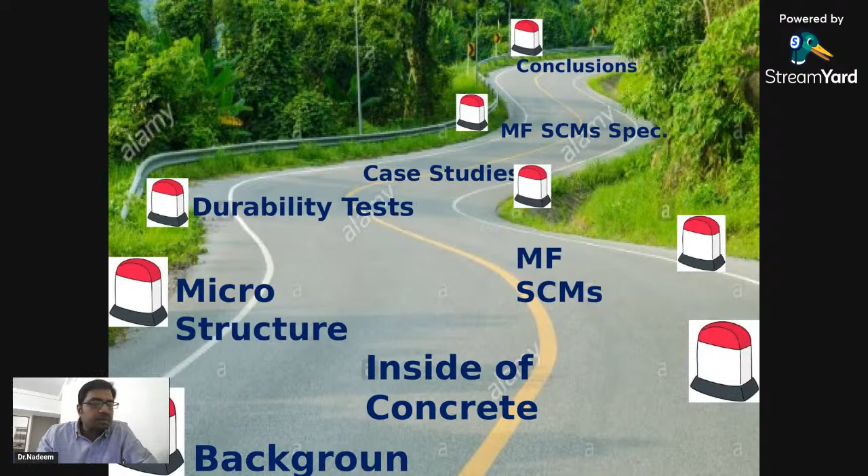To begin with, of course, importance of concrete microstructure - the properties of any material, whether concrete or any other material, is governed by its internal structure. For example, if you see steel, a slight increase in carbon content - say mild steel has a carbon content of less than 0.25%. As carbon content increases beyond 0.3%, a slight change in the microstructure level changes the entire property.

So this is very, very important. If we want any properties to be changed, that needs to be worked at a microstructure level. And this is the topic which we'll be covering in depth in today's presentation. So coming back to concrete, in concrete, porosity rules the properties. And we'll see in subsequent presentation how important it is to address porosity in concrete, for a long, sustainable, and durable concrete. This microstructural understanding opens the world for better material processing.

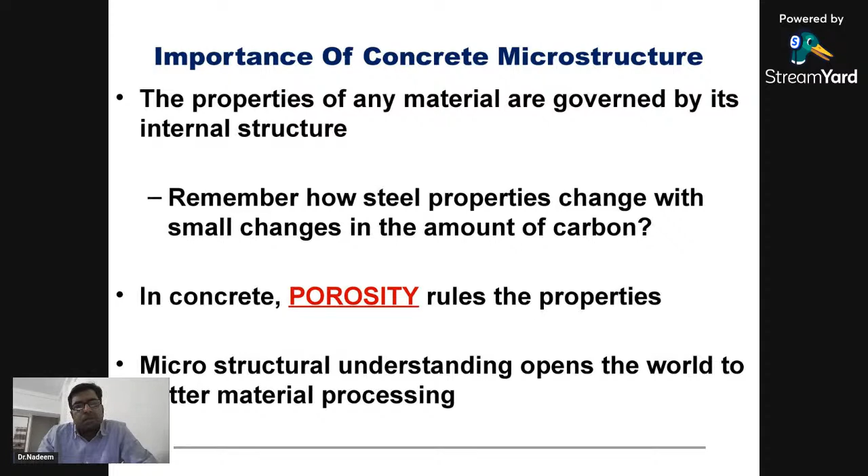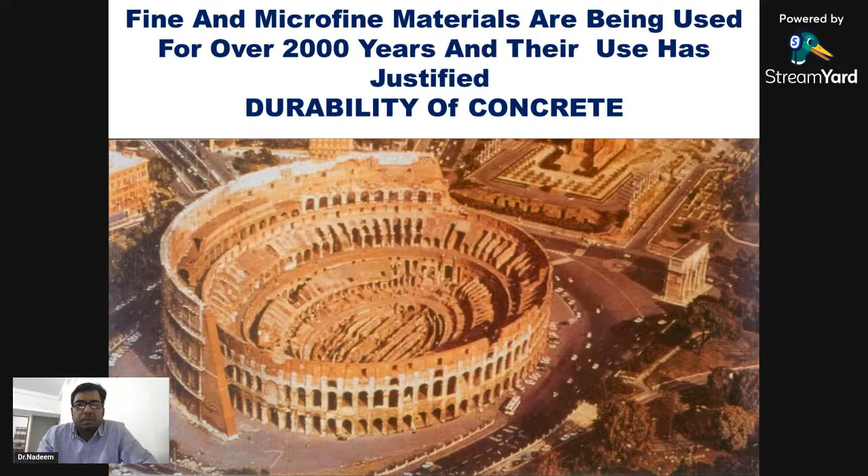In the past, if you see, Romans built very long-lasting and durable structures. 2000 years back, they were using all those advanced materials, which we now call advanced material - fine and microfine materials, maybe in the form of pozzolanic material. This is the reason all their structures are still intact after 2000 years. Based on durability parameters, those structures are still intact and standing. So these are the various properties of those materials being used in that concrete to make a durable concrete.

In modern times, also a lot of structures are being built. So many examples are there. I will not go into depth of those structures, but just to name Burj Khalifa, the tallest building - even in our country also, a lot of infrastructure projects are coming up. Even tall structures are coming up based on utilization of those materials.

Coming back to the definition of HPC, here we are talking about high performance concrete where all those materials are being used. As per ACI, any concrete which is meeting the special combination of performance and uniformity requirement, which is not possible with normal conventional concrete, is normally referred to as HPC concrete.

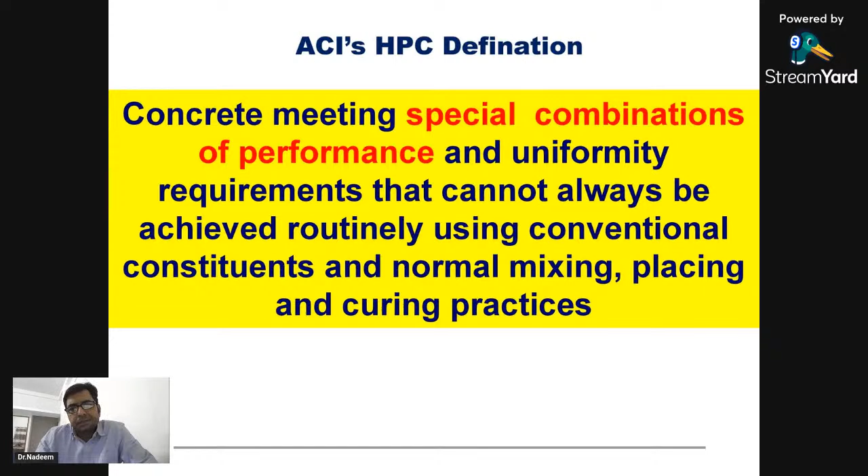And if you just see the history of use of HPC concrete after 1970, a lot of structures have been built by utilizing HPC concrete. Way back in 1973, Water Tower Place in Chicago used concrete of 62 MPa, and subsequently a lot of structures which came started using HPC with a high grade of concrete.

So there is a difference - high strength concrete is not HPC, but HPC is normally associated with high strength or high grade of concrete. So there is a clear cut differentiation which is mentioned as per the definition of ACI. So these are the list of various structures where high performance concrete is used.

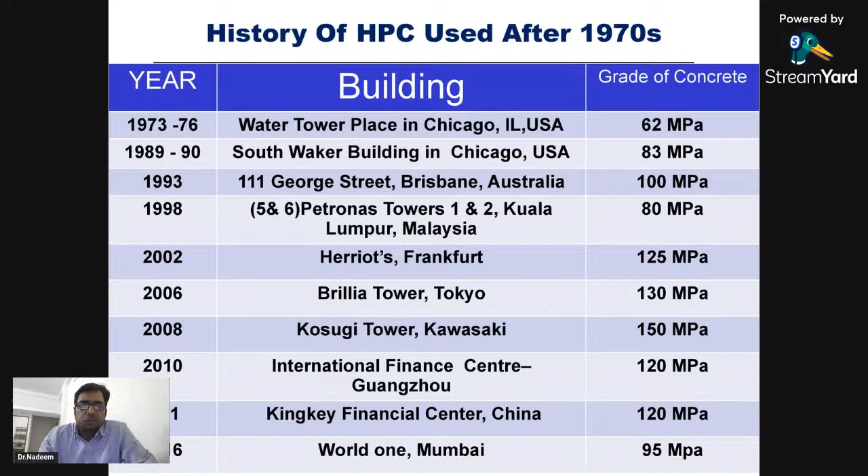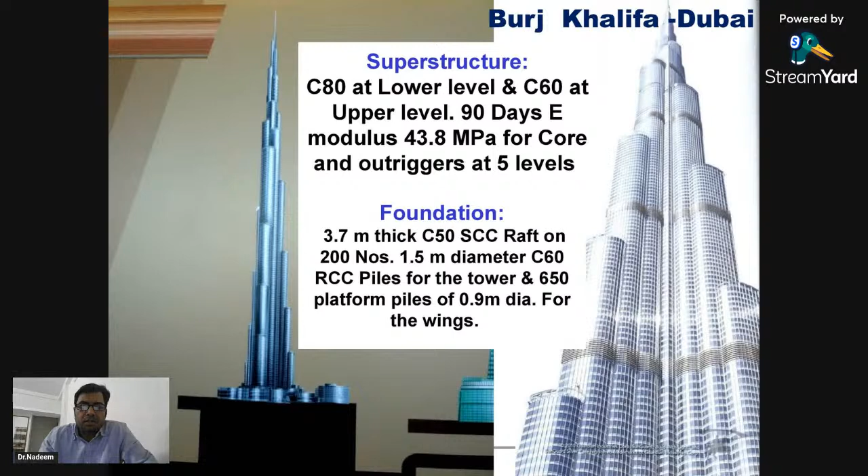Again, here being used at a lower level, with a 90 days modulus of elasticity of 43 or 44 GPa for the core and outriggers. Foundation was 3.7 meter thick, and these are the various parameters.

Across the globe, if you see Brillia Tower, Tokyo, M130 grade of concrete is being used. If you see another tower, Kosugi Tower, M150 MP grade concrete is being used in those structures.

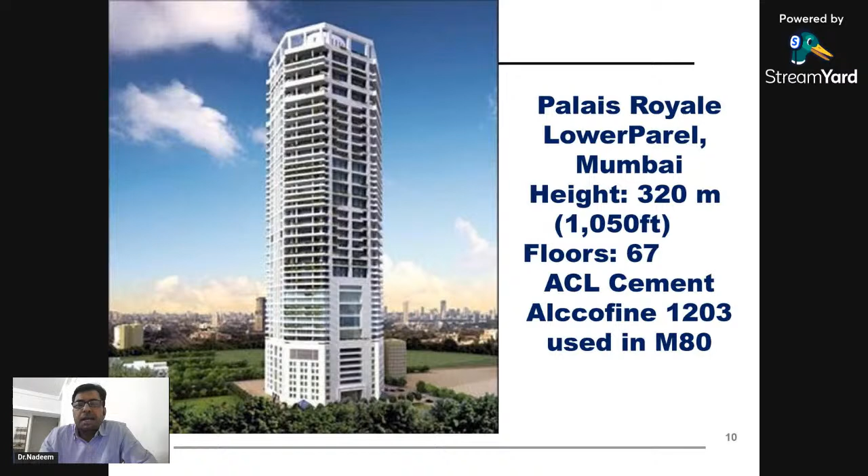In India also, nowadays a lot of tall structures are coming up, and for construction of those structures, HPC concrete is being used. For example, in Mumbai, Palais Royale is being constructed using M80 grade of concrete. World One, which is being completed, is the tallest residential tower in India.

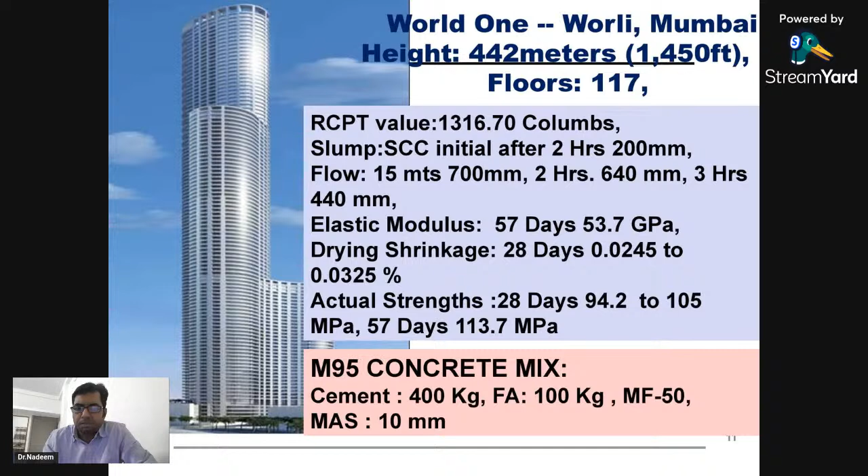So these are the typical mix designs for high strength concrete or ultra high strength concrete, as used in Japan. There are various proportions with various strengths, right from M80, M100, M130, M150.

Flow requirement is 650 or 600 plus, with low heat cement. Water binder ratio is restricted to the range of 0.30 to 0.15. Again, cement and microfine material is used along with fibers.

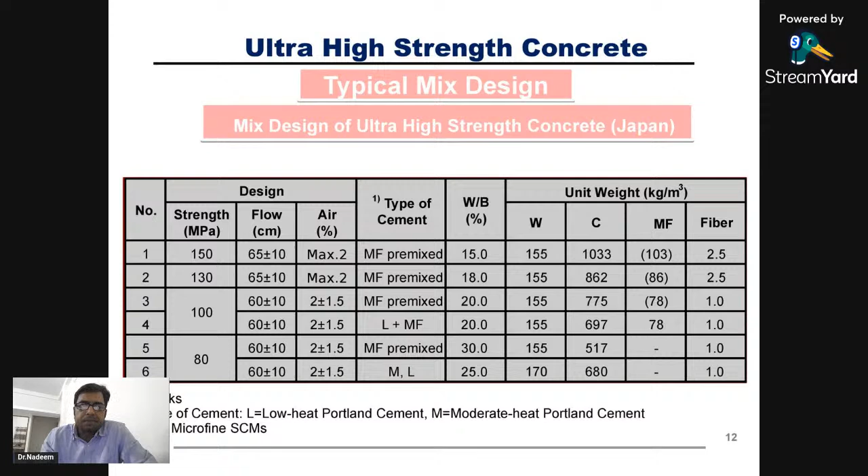Now there are various advantages of using HPC or high strength concrete. This is a typical saving which can be achieved by using high strength or high grade of concrete. So if your existing grade of concrete is between 30 to 40, and you replace it with M60 grade concrete, reduction of concrete is estimated to the tune of more than 40%.

Once you reduce the concrete content, naturally your dead load is reduced, and a structural engineer can understand how much saving he will achieve by reducing dead load by 40%. With this, reduction of the steel component is also about 39%.

And of course, if both things are reduced, naturally your cost of construction is reduced by not less than 20 to 35%, depending upon the type of structure, span, and other parameters.

Again, if you are replacing 40 MPa with 80 MPa HPC concrete, reduction of the volume of the structural member and static load is reduced by 30%.

And if you are increasing your grade of concrete from 60 to 80 MPa to 150 MPa, a lot of reduction happens. The above two advantages combined with the reduction in column cross section naturally increase your beam span, with overall reduction in cross sectional areas.

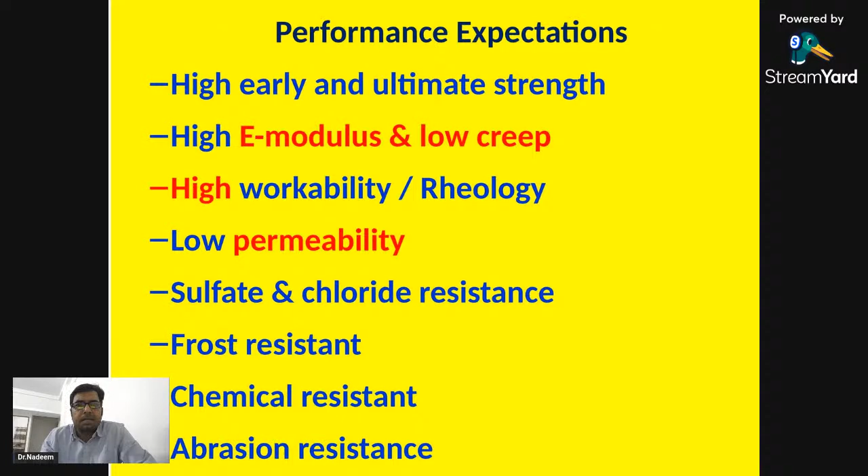And based on these performance expectations, a typical specification for concrete nowadays is like this.

Elastic modulus at 56 days in the range of 54 GPa, drying shrinkage of 28 days less than 0.025, or in the range of 0.025 to 0.0325, creep coefficient as low as possible in the range of 1.6 to 1.7, RCPT rapid chloride penetration less than 1000 coulomb, ISAT surface absorption test requirement from the durability perspective of 0.065.

These are the typical specifications being mentioned nowadays for key structures where HPC concrete is used, where we are looking for a design or service life of more than 100 years. Water permeability less than 10 mm, chloride diffusion less than 1000 into 10 raised to minus 15 meter square per second.

For flow, nowadays the majority of concrete is flowable or self-compacting concrete, where initially we are looking for a flow speed of 700 mm. No longer are people specifying in terms of slump. Nowadays it is in terms of flowability, with retention of 2 hours and 3 hours, because normally it is done with the transit mixer. So whatever time is required, a good retention is always needed in that concrete.

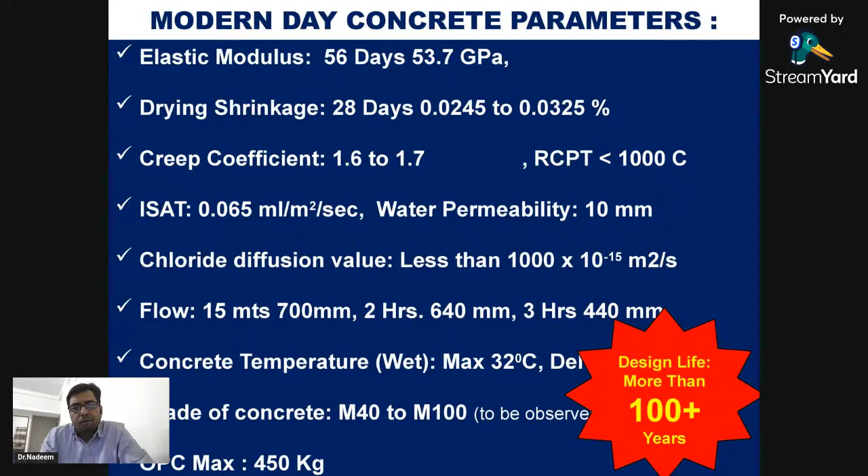Coming back to cement, slowly we'll explore the microstructure of concrete. If we see the chronology or time period of cement, normally there are four compounds, and among them tricalcium silicate and dicalcium silicate are the cementitious compounds, which later react with water and give the CSH gel or compound which imparts strength. If you see the year, the red one is tricalcium silicate and the blue one is dicalcium silicate.

Earlier the trend was that tricalcium silicate was on the lower side, maybe around 20%, while dicalcium silicate was on the higher side, about 50%. Tricalcium silicate gives early strength, but a lot of heat of hydration happens because of this reaction. On the other hand, dicalcium silicate gives strength a little slower, but heat of hydration is on the lower side.

But as time progressed and the need started coming for high strength or high grade concrete, all the cement companies started focusing on increasing the percentage of tricalcium silicate. So year wise, every decade, the percentage of tricalcium silicate in cement increases. Nowadays it's more than 60% tricalcium silicate, which started from 20%, and dicalcium silicate, which started around 1920 from 50%, has now reached almost 15 to 17%. But on one side we are getting very good strength from the cement side. Nowadays good OPC is giving strength of 60, 65, or 70 plus MPa.

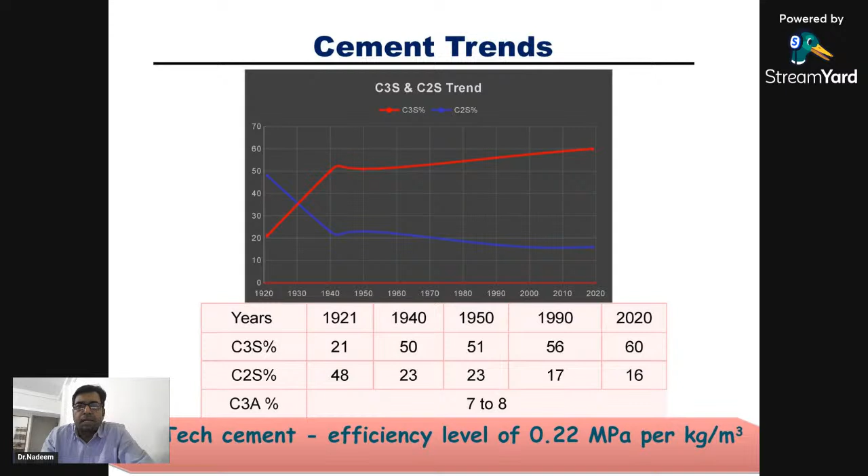Of course, the range of particles is from 0.4 micron up to 110 micron. But the majority of particles, the average particle size, are in the range of 25 to 30 micron in a typical cement.

Just to understand the reaction, we now start understanding the microstructure. These are the various sizes of particles present in a cement, in the range of around 0.4 micron up to 110 micron, with various sizes like 25 to 30 micron. Depending upon the size, the reactivity of each particle is different.

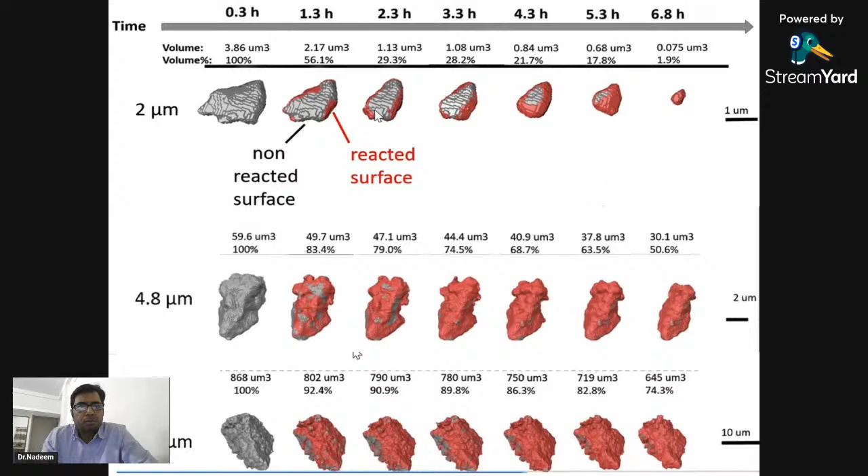If you see a 2 micron cement particle, the top row shows time: after 0.3 hours, 1.3 hours, how this cement particle starts reacting once water is added. Slowly and slowly it gets reacted. This is 4.8 micron, and this is below that size.

If you look further into the particle, take a typical particle of 2 or 3 microns. Once it reacts with water, slowly you will find this is anhydrous unreacted tricalcium silicate. This part is reacted, and if you cut deep inside the particle, you will find how it starts getting reacted, with a lot of shrinkage and pore formation happening in this reaction.

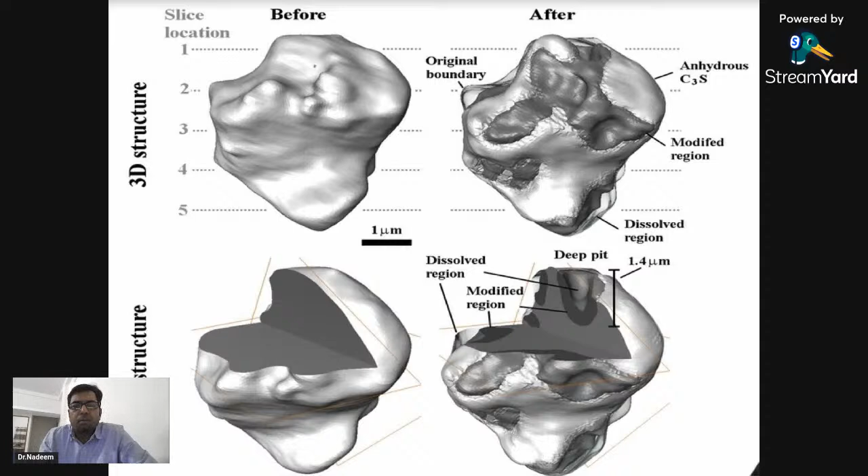We'll see this in subsequent slides. As the reaction happens, each particle reacts in parallel, but a lot of shrinkage and pore creation is happening, because of the water added, only 50 to 60% gets used in the reaction, the rest evaporates, creating a lot of pores in cement or concrete. This is how a cement particle of this size gets reduced into a hydration product after about 24 hours.

After 24 hours, you can observe these particles reacting to form different compounds like CSH, calcium hydroxide, and other compounds, with a lot of pores being created in these particles.

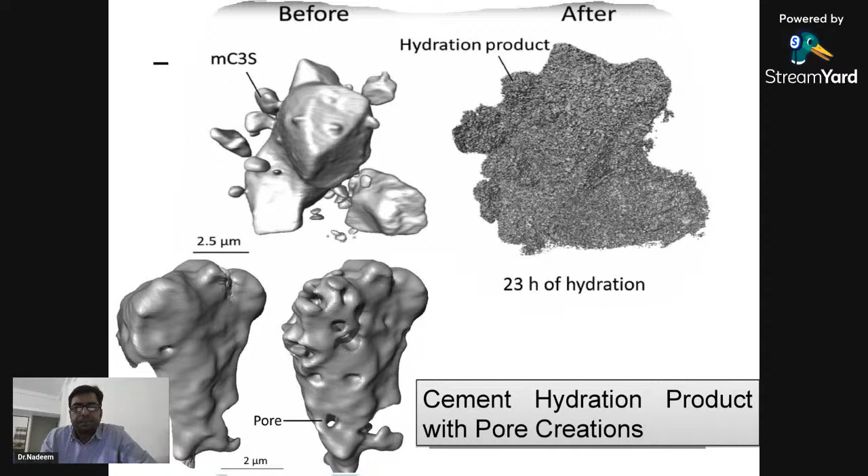So just to understand, this is a phase of cement. There are four major compounds. The majority is tricalcium silicate, which we just understood, along with dicalcium silicate, tricalcium aluminate, and tetracalcium aluminoferrite. Through various reactions and ionization, these get converted into different compounds.

The majority compound is calcium silicate hydrate gel, at 48%, which is the compound that actually imparts strength to the structure. Then there are anhydrous or unreacted products, and pores created because of evaporation of water during the internal reaction, along with other compounds.

Here is the calcium hydroxide, this is the ettringite, and this is the calcium aluminoferrite phase. These are the various phases created out of the four major compounds.

Here's another way of looking at that reaction. On the x-axis is time, and these are the four major compounds. Once you add water, you can slowly see the changes happening with respect to time. Initially the majority compound is tricalcium silicate, and slowly it gets converted after some time.

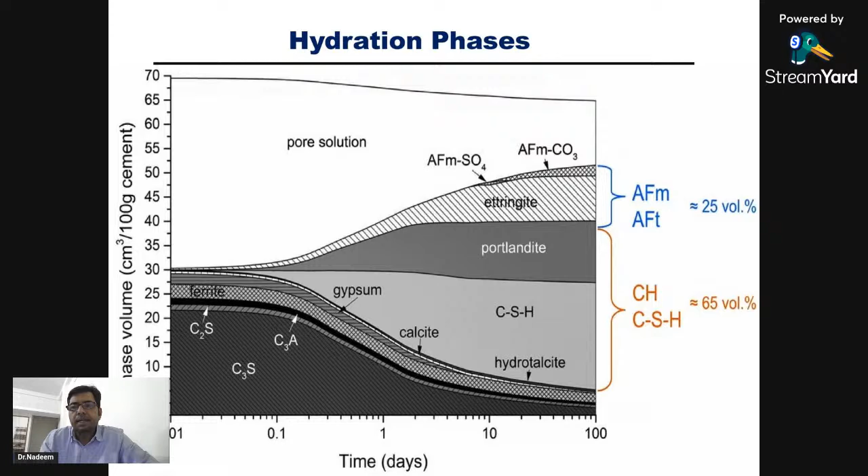This is at 100 days. The majority of the material is converted into CSH gel, portlandite meaning calcium hydroxide, ettringite, and other compounds. CSH is in the range of 65%, and 25% is ettringite and aluminum ferrosilicates.

If you see the microstructure of cement, you will observe all these compounds. We have tricalcium silicate, we have calcium hydroxide which is unstable, and we have an outer shell of calcium aluminum silicate hydrate, CSH.

This is porosity, this is ettringite, and this is how the various phases appear in cement after 28 days, which will slowly get reduced over time. So it's a combination of pores, calcium hydroxide which is an unstable compound, and CSH gel along with other compounds.

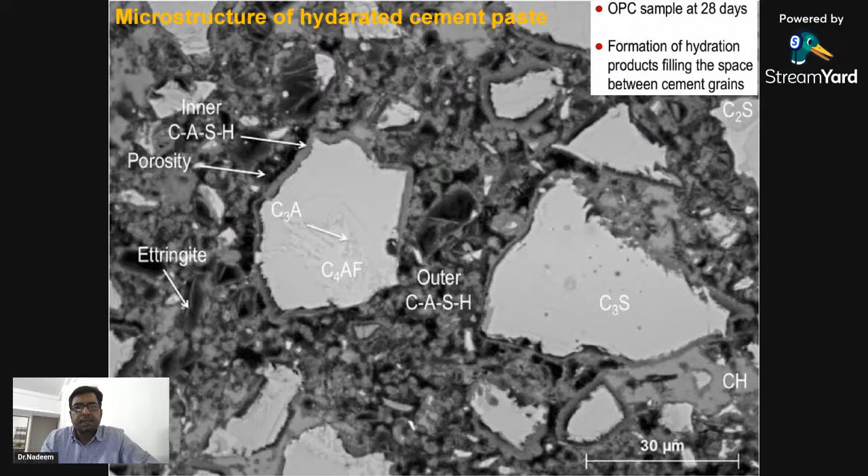So if you begin with this, in the beginning we have 40% of a cementitious material in the form of sand, aggregate and this thing, and 60% is in the pore space. This is being converted later on with 80% solid volume and 20% in the void volume.

This is the normal reaction that happens with OPC and H2O. You get CSH, and then we have calcium hydroxide, which is a weak compound. CSH forms a strong paste to bond all the aggregates together, so this is the compound which imparts strength in concrete. But because of this reaction, a lot of heat of hydration gets evolved.

Now, 50 to 60% of the water we add, say at a water cement ratio of 0.3, 0.35, 0.4, or in high grade concrete nowadays we use a water cement ratio of 0.2 also, only takes part in the hydration reaction.

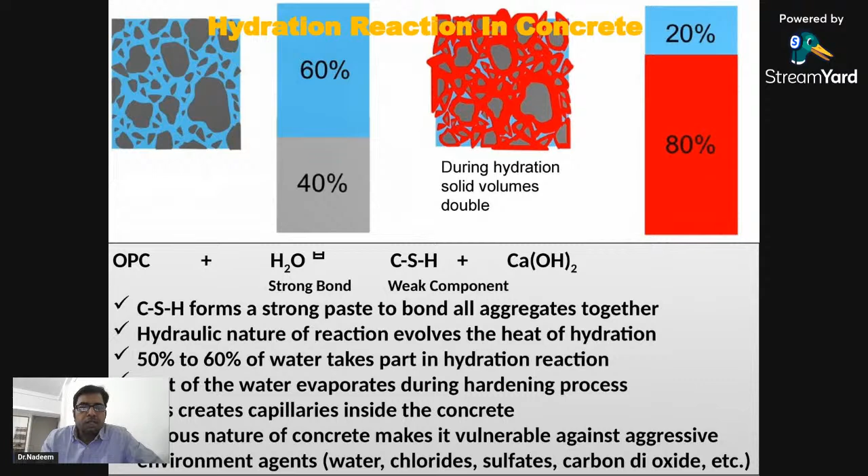The rest of the water gets evaporated, which creates a lot of capillary pores that we need to address. If you want a concrete to last long, say for 100 plus years of service life, then we need to address these issues, which we'll discuss in subsequent slides.

So these are the particles of cement being converted into a compound, but now you will observe a lot of porosity is being created. If you look at a micro level, a lot of tunnels of pores are being created here. This is a size of 2.5 micron only, but inside you will find a lot of porosity.

So if you convert tricalcium silicate, this compound reacts with water and forms the CSH gel. If you also include calcium hydroxide, there is a reduction in volume, and this reduction is in the form of evaporation of water. For tricalcium silicate, the delta comes out to 3.6%, and this 3.6% is nothing but remaining porosity.

Coming to dicalcium silicate, which reacts with water forming CSH and a byproduct in the form of calcium hydroxide, again there is a delta of 0.4%. Now both these deltas are nothing but porosity being created in the concrete.

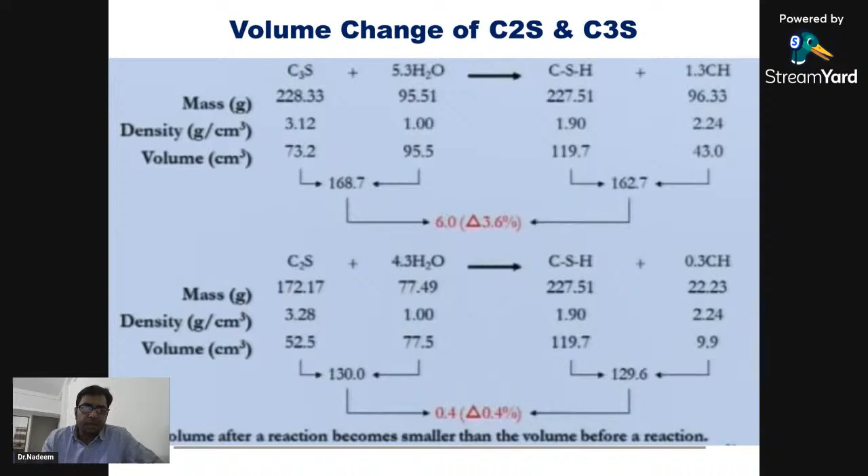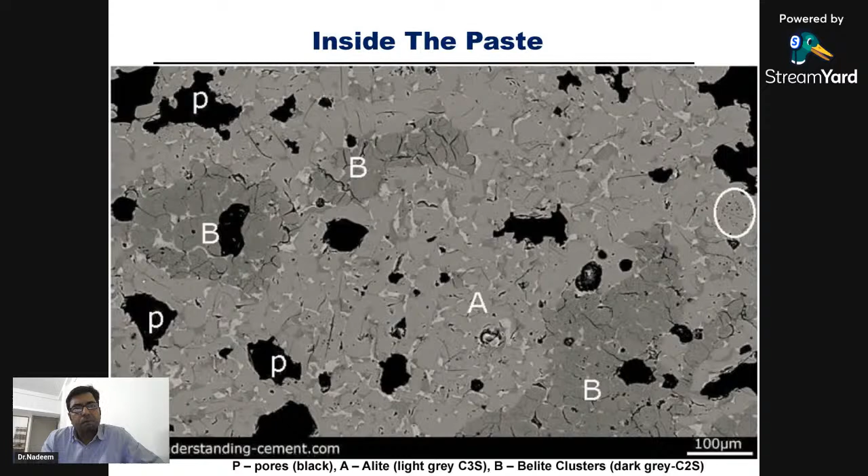So if you again see our microstructure of concrete, you will find B is belite, dicalcium silicate, A is alite, and P, this black part, is pores. So whatever content reduction is happening, through evaporation of water, is being created in the form of pores that remain in the structure.

So this is how porosity occurs. Now, porosity is nothing but the amount of air filled space in the material. So in any structure, whatever remaining portion is air filled is called porosity. Now what is the difference between porosity and permeability?

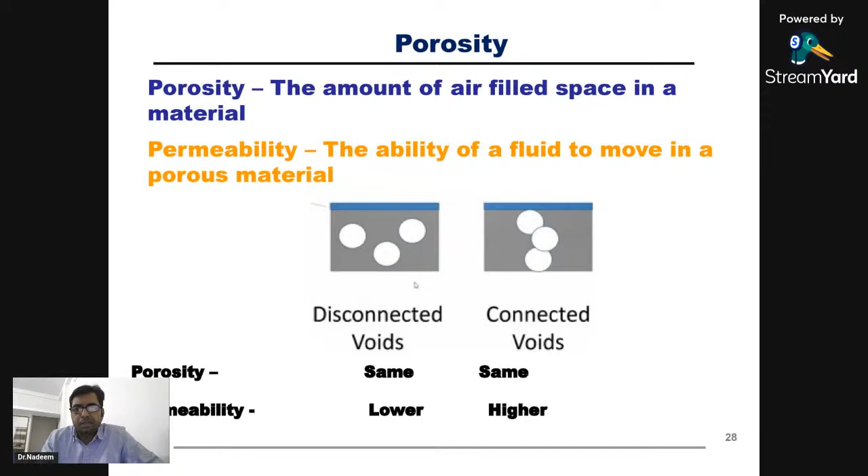So even if you have porosity in your concrete, if it is not connected, it's fine, not much harmful. But if it is connected and gives a passage, then it is quite harmful, allowing a lot of material to ingress. So porosity wise both are same, but in terms of permeability, the left side is less permeable and the right side is highly permeable. Just to understand the difference between porosity and permeability.

So there are five types of pores created in concrete, having different sizes. First is entrapped air, another is entrained air, which is in the range of 10 micron to 250 micron. For capillary pore, the sizes are in the range of 3 micron to 30 micron.

Now just go back and remember our particle size distribution of cement. Cement's average particle size is in the range of 20 to 30 micron. Beyond this, particle sizes exist, but the majority are at a level of 25 to 30 micron. What about these pores, which we need to address?

Even for normal supplementary cementitious material, particle sizes are in that range only. Now there are gel pores with a size of 1 micron to 3 micron. And there is a fifth one, intercrystallite pore, which is about 1 micron or 1.2 micron. So these are the various pores in concrete which we need to address.

Coarser ones we are addressing with cementitious material. This one we need to address with some other material. So you can't address all the pores with one material or one way of giving a solution. We need to have a different, staggered solution to address these types of issues arising in our concrete.

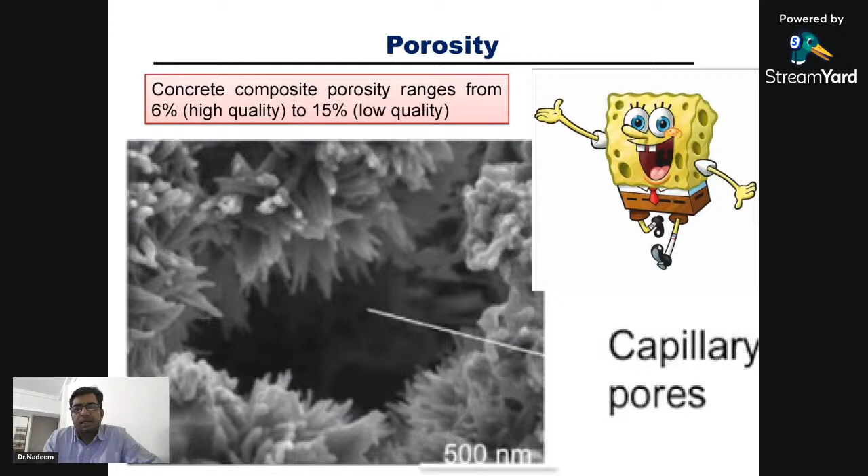Now what are the drawbacks, disadvantages of these pores? Naturally, once you have connected pores, which we understood is called permeability, these are interconnected. Naturally these are the elements which will try to enter: environmental pollutants, acids. These are the sulfates, maybe in the form of internal, external also. These are the chlorides, carbon dioxide, and water.

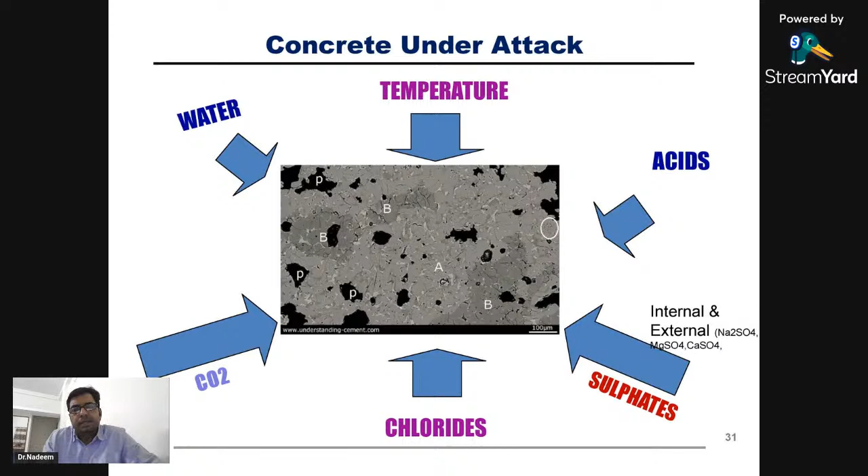These elements are trying to enter into the concrete through the pores. Once you have higher permeability, naturally ingress will be quite fast. And subsequent reaction happens in the form of carbonation or corrosion of reinforcement.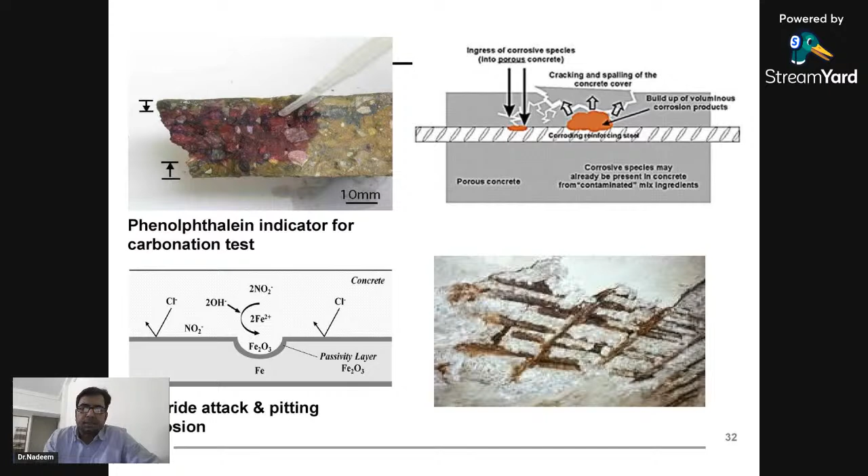Once the passivity layer is disturbed, naturally it becomes acidic. And once chloride and water ingress happens, corrosion starts to the reinforcing steel, and this causes deterioration of the concrete structure. So once corrosion starts, it swells to the tune of 5 to 6 times its original volume, and it creates a lot of pressure on the surrounding concrete.

Initially cracks happen and then spalling of the concrete starts. So this is the deterioration that happens to concrete if permeability and porosity are not addressed. Maybe it happens after 5 years or 10 years down the line.

Now what are the steps to improve durability? There are four major steps which we can address to improve durability. One is to reduce the porosity, which we understood is basically from the paste component of concrete.

So by using microfine material along with cementitious or supplementary cementitious material. Using pure supplementary cementitious material in the form of normal fly ash and GGBS will not work alone with cement. You need to add microfine material because there is a gap in gradation. We just saw the sizes of particles and the porosity sizes.

To address that, you need to add microfine materials, reduce the water cement ratio, and reduce calcium hydroxide generation by utilizing that compound through SCM. With pozzolanic action, the pozzolanic material reacts with calcium hydroxide and converts it again into CSH gel. And of course, increase the packing density of the paste component, because cementitious material has certain particle sizes which also create porosity that we need to fill with finer material. So these are the four basic steps to improve durability.

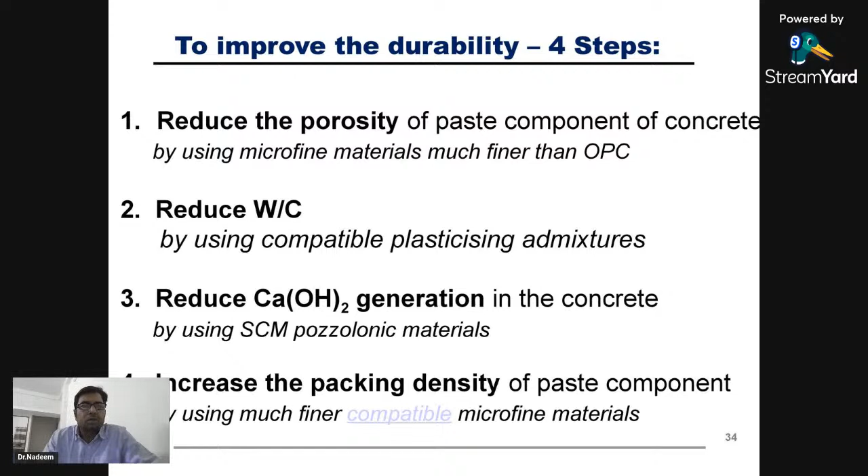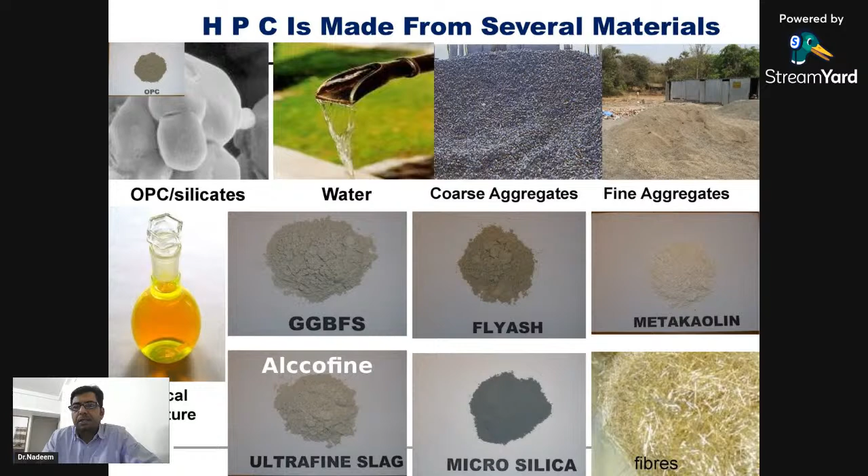Now, HPC is made with these materials. Of course, you have OPC, then you have water, coarse aggregate, fine aggregate. You have chemical admixtures, water reducing admixtures. You have supplementary cementitious material in the form of GGBS, fly ash. Then you have a microfine supplementary cementitious material in the form of ultrafine. We have one product, Alccofine, microsilica or metakaolin, and fibers being used in concrete depending upon the requirements.

Now, binders being used in concrete, of course, you have Portland cement, which we can't avoid. But along with Portland cement, naturally we have to use the pozzolanic material in the form of either fly ash or GGBS. So we end up with blended cement. Naturally, once you have blended cement, again this blended cement is not enough to address the need of durability of a service life more than 100 years.

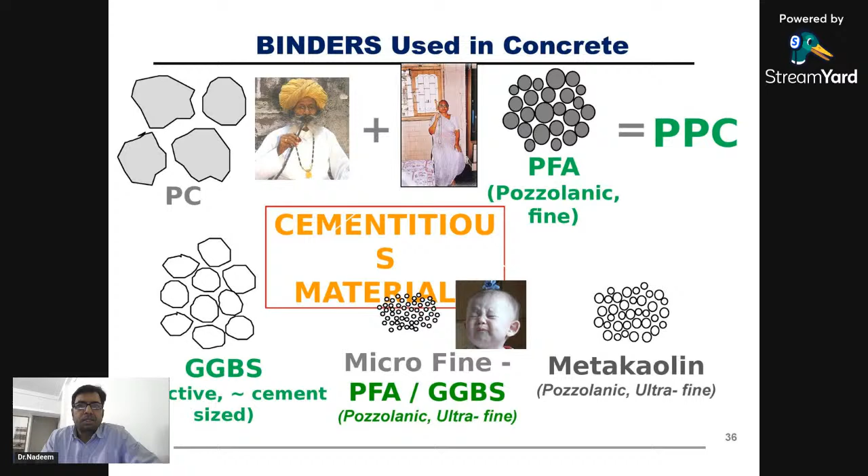Because a lot of porosities are there which is not being addressed by these materials. Naturally, you have very fine pores which need some other material, which is in the form of microfine material, in the form of either microfine fly ash, microfine GGBS, or metakaolin or microsilica. So combination of these materials will address those issues. So this is a binders combination of all the materials.

So once you have this material, we have OPC and silicates. With the water, the formation of CSH happens, and byproduct is in the form of calcium hydroxide portlandite, which we don't want, which is unstable. It reacts again with maybe carbon dioxide and leaches out by forming calcium carbonate. So we don't want this product, which is unstable. Again, we want it to react with pozzolanic material. Again, it reacts and forms the CSH. These are the cycle of component for the durability.

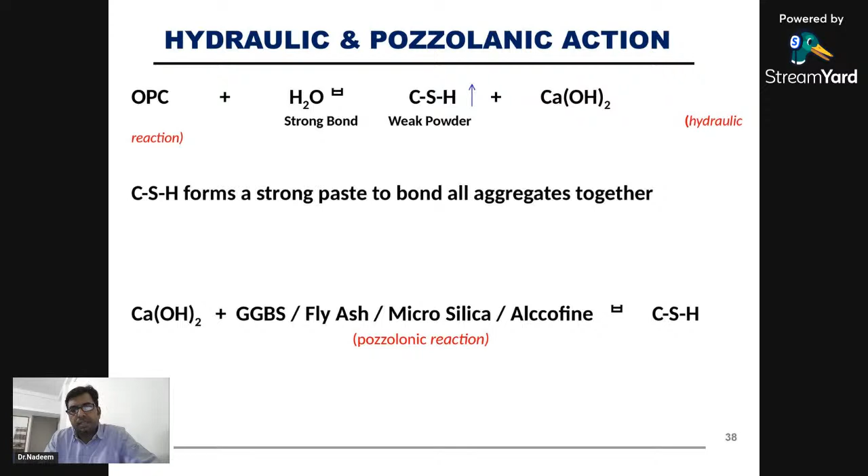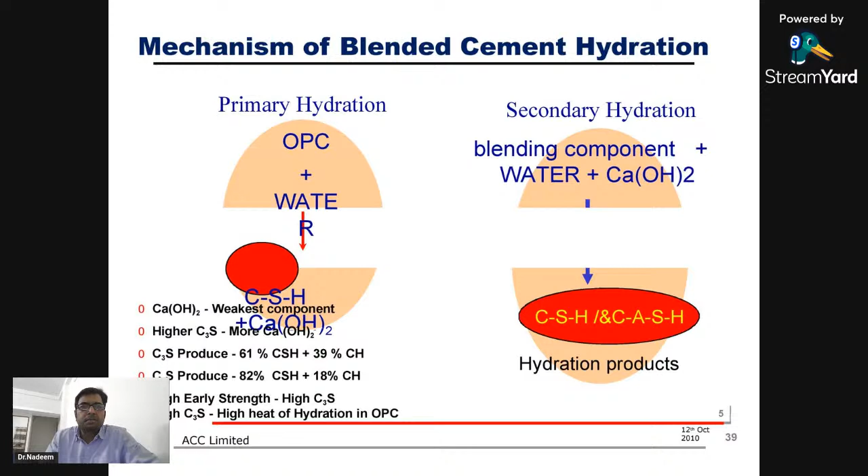So this is the reaction explained with OPC, water, CSH, and byproduct in the form of calcium hydroxide. Again, CSH being formed, which is a very strong paste which binds all the aggregates together. But again, once you have calcium hydroxide, that is to be utilized by way of supplementary cementitious material, either GGBS, fly ash, microsilica, ultrafine GGBS, or Alccofine, and again it forms the CSH gel. So this is primary hydration, OPC, water, and this is a secondary reaction. So whatever the calcium hydroxide, again it reacts with water and pozzolanic material, silicates, and again it gives CSH or CaSH, calcium aluminum silicate hydrate products. Again, this is a cementitious material which imparts strength to the structure.

So SCMs are like vitamins for concrete. Like for the human body, we have basic components which we need to consume in the form of proteins, fat, and carbohydrate. But along with this, we need a lot of vitamins to maintain a lot of functions. Similarly, in concrete also, one side we are using cement, but along with cement, you need normal SCMs along with microfine SCMs. So combination of this will act like a vitamin in concrete that is to be used. So you can't think of using only fat, protein, or carbohydrate. You will sustain, but for the long serviceability, a life without disease, naturally you need to consume a lot of vitamins. And for structure also, along with cement, we need to take other SCMs also, in the form of normal SCMs and microfine SCMs.

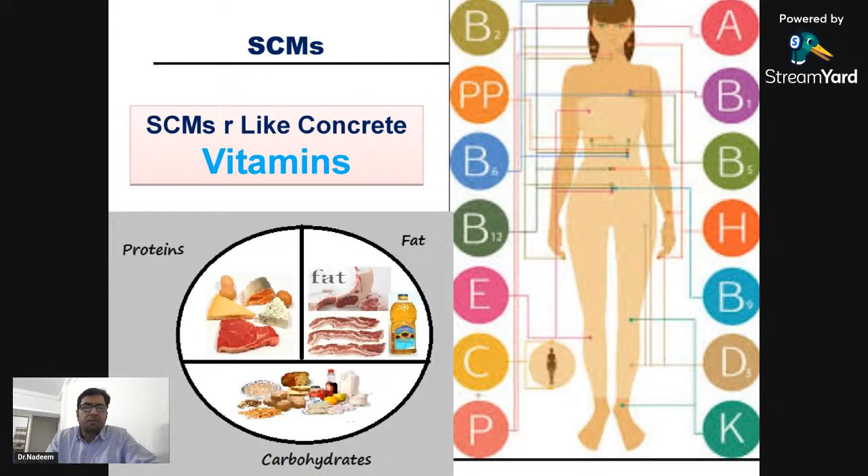So these are the supplementary cementitious materials. At a macro level, pozzolanic materials are fly ash and GGBS. At a microfine level, we have microsilica, metakaolin, rice husk, or ultrafine slag. We have one product, Alccofine.

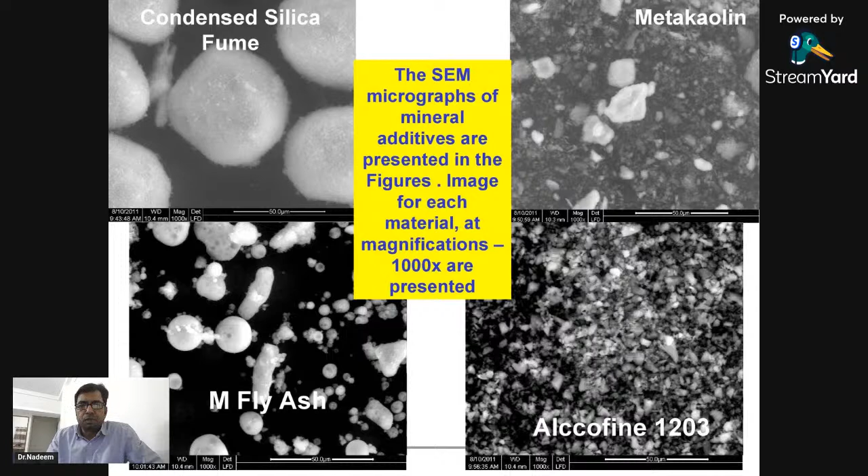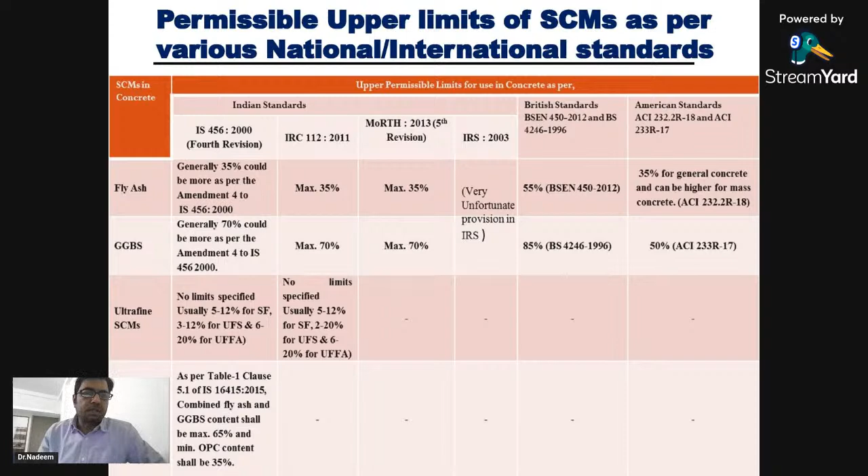In terms of permissible upper limits of SCMs, fly ash has an upper limit of say 35%. GGBS upper limit is 70%. Ultrafine SCMs, of course, those materials come under the head of fly ash or GGBS, but normally it is used in the range of say 5 to 12%, maybe ultrafine GGBS or Alccofine or silica fume. Normally the dosages are in the form of say 7 to 8%, which gives quite a good result along with supplementary cementitious material and OPC.

These are the effectiveness of various SCMs. Naturally, each SCM has different aspects. Coming to resistance to alkali silica reaction, carbonation resistance, chloride resistance, sulfate resistance, and resistance to industrial waste - these are the supplementary cementitious material performance parameters. In that way, GGBS is performing among all the SCMs the best in all the parameters.

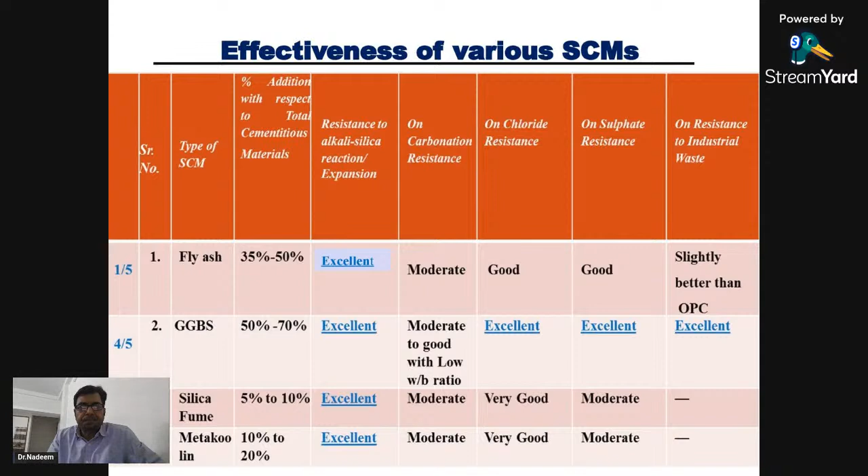Of course, microsilica is submicron, but microsilica is not available in pure form because sizes are in the range of say 0.2 micron to 0.0002 micron. So quite a fine material, but it is suspended. Practically, it's not possible to use that material. So it is densified - once it is densified, the sizes get increased.

In a normal size, if you see a cement particle - this is a cement particle - average size is say 25 to 30 micron, and these are the microfine materials, a combination of these things. If you see at a micro level, even for cement particle, a lot of voids, lot of gaps are there in between. So to fill those gaps, you naturally need a microfine material to go inside, because in between, if you add water, water gets entrapped here and is not being used.

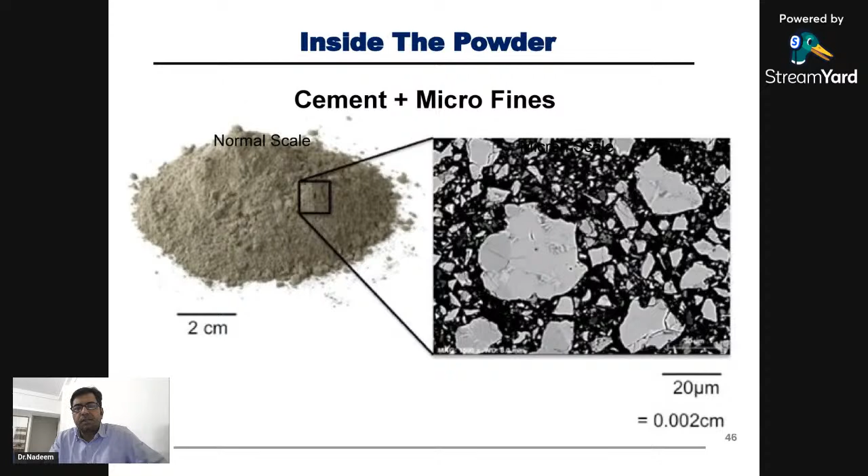So there is an experiment when you add microfine material inside this cement matrix - water gets taken away from this combination, and you will get a lot of flowability in that matrix. So this is the advantage of adding microfine material into a cementitious paste.

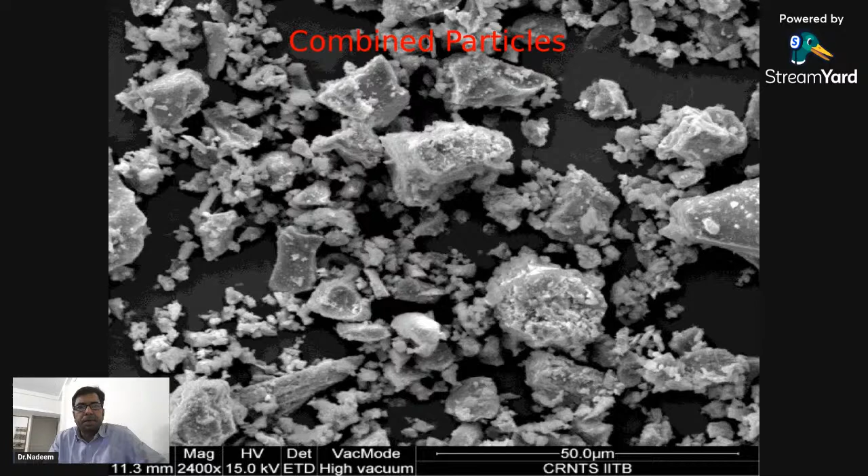These are the combined particle sizes, actual pictures of the particles. So these larger particles are cement particles, and inside these are the microfine materials. Looks like an aggregate, but this is a cement particle at a micro level. So this is how the particle density works - these are the cement particles.

Naturally, we just saw some SCM pictures - micrographs. A lot of voids are there inside. So just to fill those, you need a microfine material. It goes inside, and that is how optimum packing is achieved.

So microfine material works in both ways. One is mechanically, by going inside and fixing those smaller gaps - mechanically, it is actually enhancing the packing density. And then chemically, it is reacting with calcium hydroxide, again making a secondary gel reaction. So in both ways it is reacting and giving the advantage of these materials.

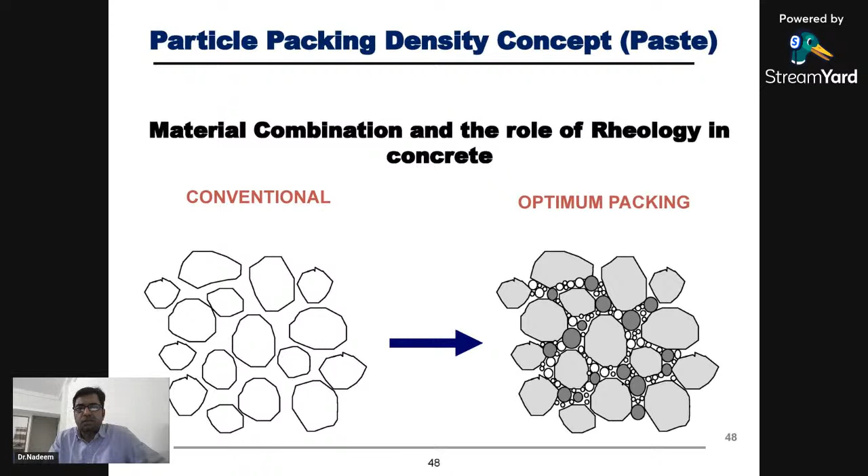The optimum particle packing density of binders is basically dependent on particle size distribution of all the binders, including that of cement, particle shape and size, chemical and mineralogical composition, loss on ignition, uniformity, consistency, and dosage or proportions. So these are the particle size distributions of all the elements being available in a cementitious matrix.

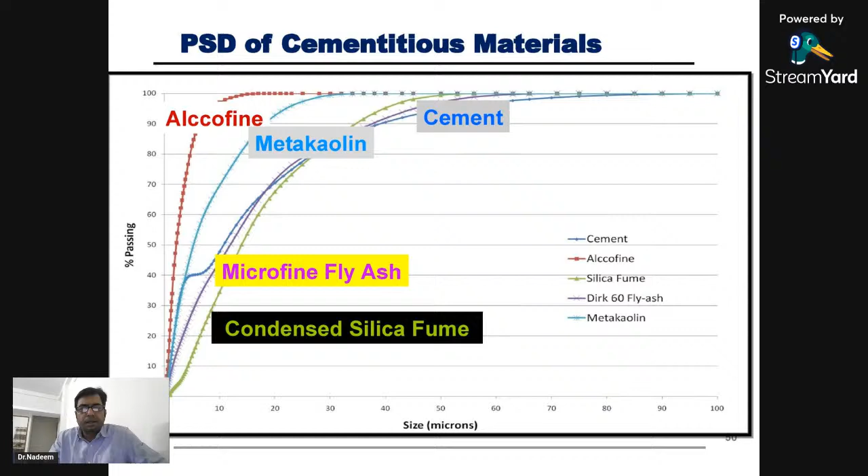If you just see, this is a particle size distribution of cement, and this is a particle size distribution of Alccofine 1203. So quite fine - a lot of pores are being filled with this material. So whatever gap grading is happening at a cementitious level is being filled with microfine material.

Like in aggregates, normally we work on the gap gradation, in the sense we are working on the packing density - sand, 10mm aggregate, 20mm aggregate. But this packing density is at a micro level.

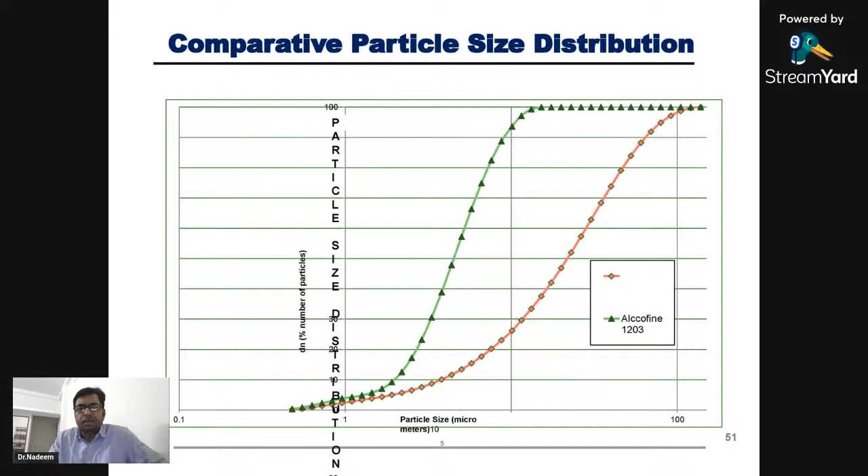If you see... okay, it's not visible.

Now there are various tests being done with the reactivity of microfine materials. So these are the three products being used: alcofine, metakaolin, and silica fume. And there is a test as per ASTM, as per IS 1727. So these are lime, alcofine, and these are pozzolanic material, and these are standard sand.

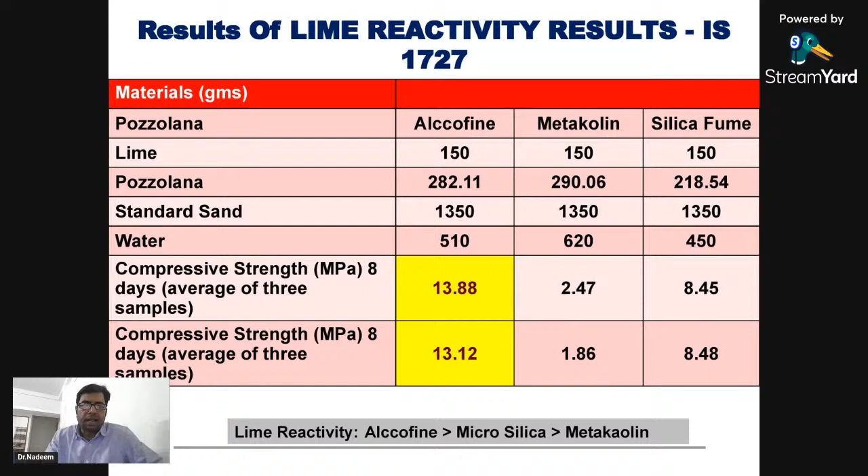1:3 proportion mortar cube is made with water based on consistency, and then compressive strength is checked. It actually gives the indication of reactivity of a pozzolanic material with lime. So one side is alcofine, giving a compressive strength of around 13.8 or 14 MPa. Metakaolin is giving 2.47, silica fume is giving 8.5, which indicates the lime reactivity or reactivity of a pozzolanic material with lime. So here reactivity is...

Coming to pozzolanic activity as per ASTM C1240, here cement is being replaced at 15% with various microfine materials like ultrafine GGBS or alcofine, silica fume, or metakaolin, and its strength is checked with reference to a reference mix. The reference mix gave 22 MPa. Against that, alcofine gave around 32 MPa, silica fume 29 MPa, and metakaolin also around 29 MPa. These are the tests conducted for knowing the pozzolanic activity as per ASTM.

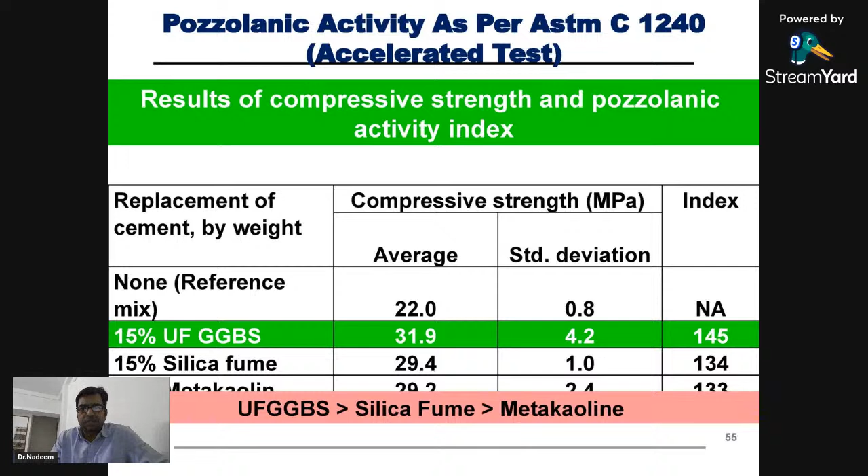Now there are various tests to check chloride permeability, because chloride is a material which directly attacks reinforcing steel and starts corrosion, which is very important looking at durability aspects. So our whole attention is towards reducing porosity so that chloride ingress will be at the lowest level. There are various tests developed to test the permeability or penetration of chloride.

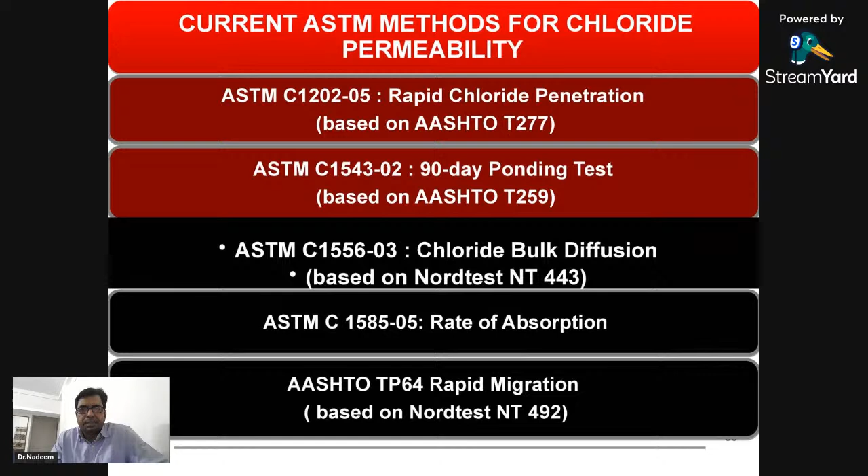This is ASTM C1202 RCPT, which is a very popular test. Majority of sites nowadays use this RCPT. There is a 90-day ponding test where a slab is made of the same concrete and a solution of NaCl is poured over it, observed for 90 days. After 90 days, the slab is broken into pieces and penetration of chloride is checked. There is another test, chloride bulk diffusion, and another, rate of absorption and migration test. There are various tests, we'll discuss a few.

So this is our most popular test, RCPT, popular because it's quite fast. One side is your concrete, 100mm diameter and 50mm thick. One side there is a solution of NaCl 3%, another side is a solution of 0.3 sodium hydroxide, and current is passed from one end to another with a fixed voltage of 60 volts.

Naturally, current is nothing but a passage of charges. Whatever charges are there, they pass, so not necessarily chloride ions are passing. This is a major drawback of this test, RCPT. Whatever charges are passed are measured here in the form of coulombs. Coulomb less than 1,000 is considered good, 1,000 to 2,000 average, and above 4,000 is called poor.

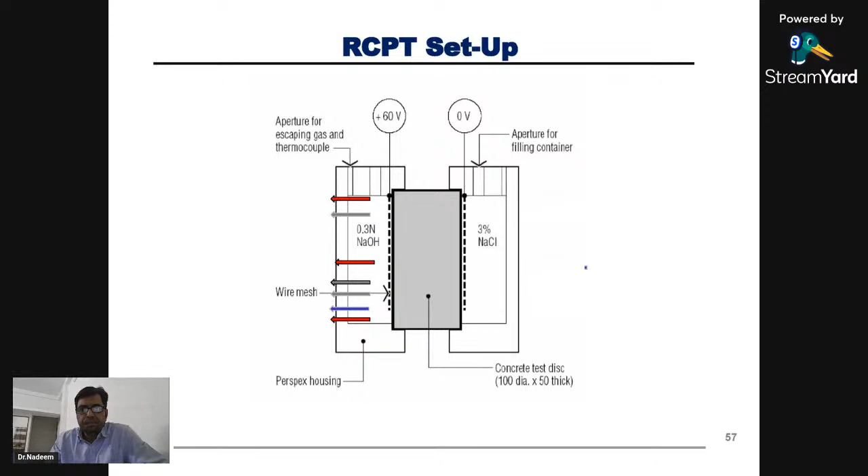But there are a lot of drawbacks of this test. In RCPT, we call it resistance to chloride ion penetration, but actually it is measuring the passability or conductivity of electric charges. So whatever charges pass are not necessarily chloride charges, there are many OH ions, many ions which pass.

Even ASTM 1202 clause 1 says this test method is applicable to types of concrete where correlation has been established between this test and a long-term chloride ponding test. So what ASTM is saying is, if you want to use this fast RCPT test, before that you have to make a correlation with the ponding test, which is a 90-day ponding test, compare the penetration happening there, draw a correlation, and then use it.

There are various other clauses, like if you are using an admixture of calcium nitrite, it gives a very different reading. Another thing is their precision statement allows for a variance of 42% - even for the same batch of concrete tested in the same laboratory, a variance of 42% is acceptable. And if that sample is tested in another laboratory, a variance of 51% is allowed. So these are the drawbacks of this test, unless it is tested with a correlation.

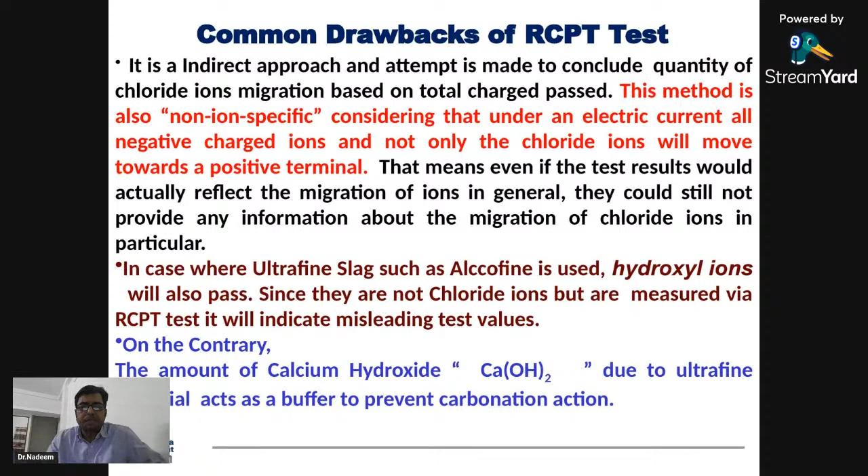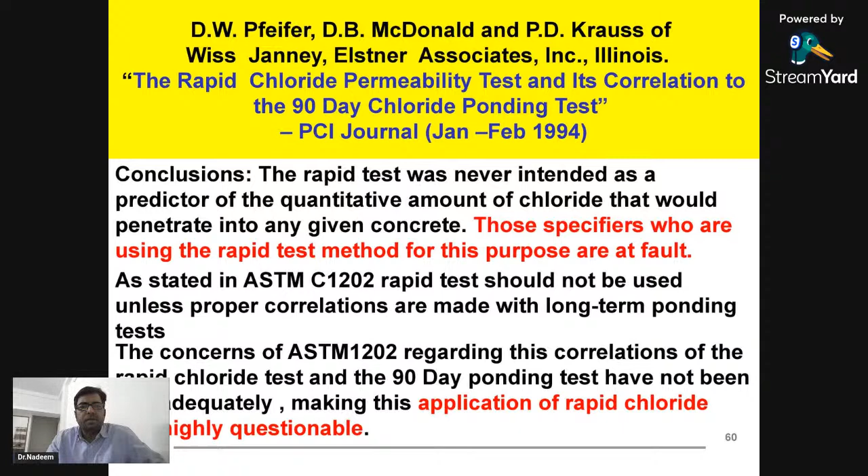If you are purely using this test, which is not recommended even as per ASTM, we need to draw a correlation with the same type and grade of concrete. This is a conclusion from various experts. So those specifying RCPT value independently, it is not recommended. It is to be done along with a 90-day ponding test, make a correlation, and then test for the rapid chloride migration penetration test for the concrete.

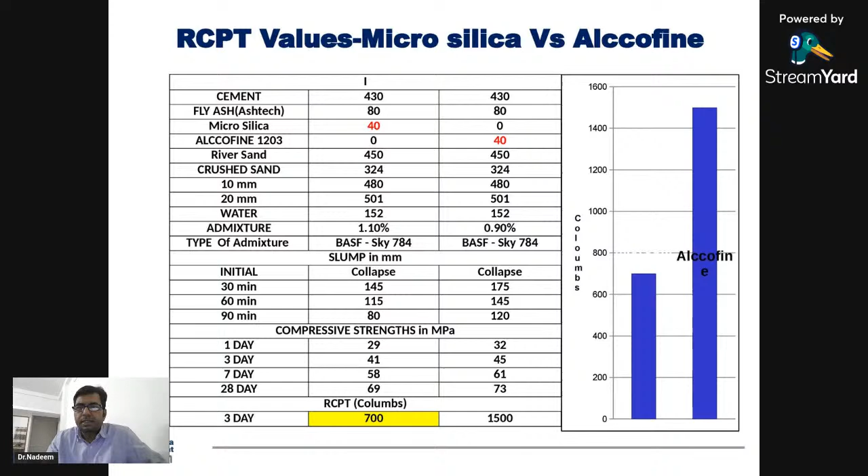So if you see, we tested it. In one micro silica it is giving a value of say 700, and in another case it is giving 1500 as per RCPT. Once we did a pond test, the values are totally reversed. If you see the pond test, the values are quite low as compared to the RCPT values. So these are the drawbacks. Unless and until we draw a correlation of RCPT with ponding test on the actual same concrete, otherwise such misleading results will come if you are using RCPT independently.

Coming to sorptivity test, again this is an indication of absorption, which is along with the chloride migration. Here we are checking the absorption of water, which indirectly checks the permeability of the concrete. Once you have pores, if the pores are interconnected, naturally permeability is on the higher side, so higher absorption will happen. If your permeability is on the lower side, your absorption will be on the lower side. So this is the sorptivity test.

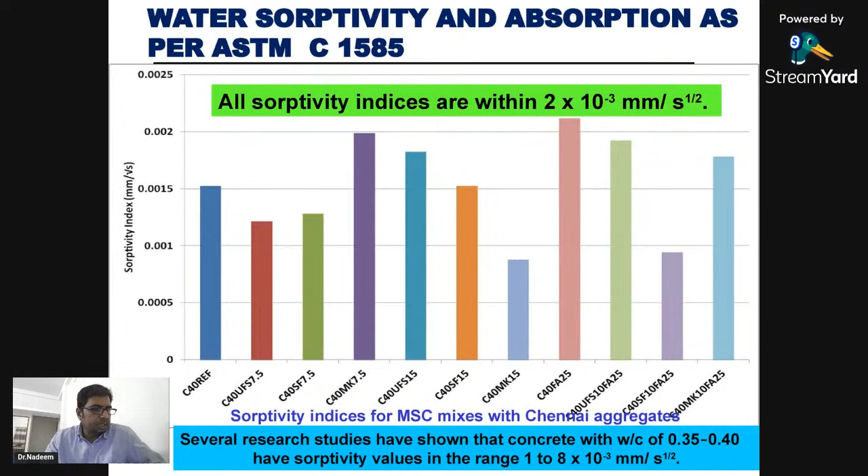Another test is water permeability. Here 0.5 MPa of hydrostatic pressure is maintained for 3 days, and afterwards the sample is broken and water penetration depth is checked. Normally less than 25 mm is recommended, but for structures where the service life is designed for more than 100 years, water permeability of 10 to 15 mm is normally recommended.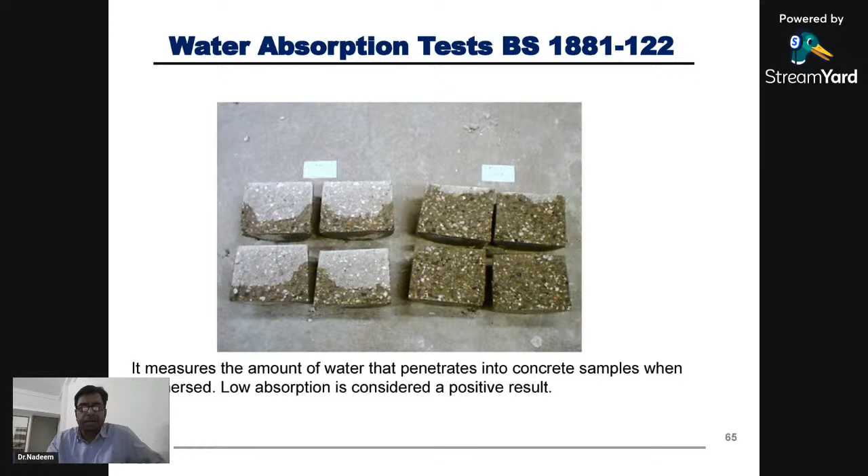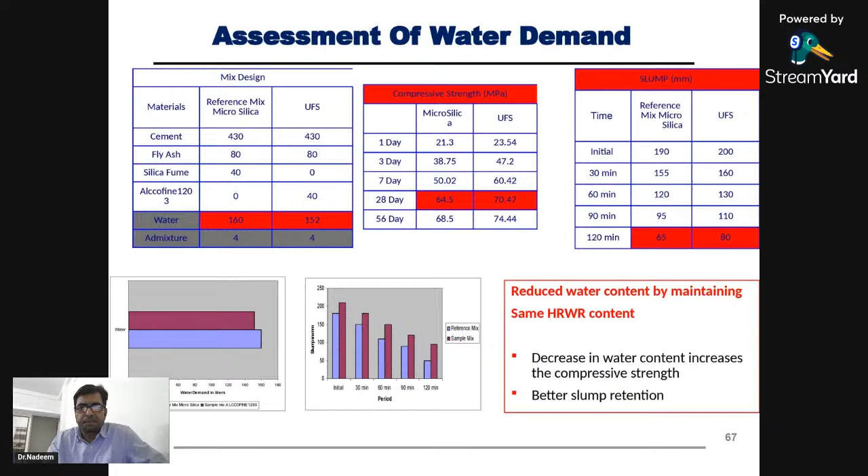These are the assessment of workability. Comparison is being done between silica fume and ultrafine slag, and these are the results. So naturally, compared to silica fume, it gives better workability in terms of water demand, also giving better retention as well as reduced water demand. So this is how alkalinity of the pore solution is maintained, because if you are using ultra-fine slag, namely 1203, calcium oxide is in the range of 34%, while calcium oxide content in OPC is 63%.

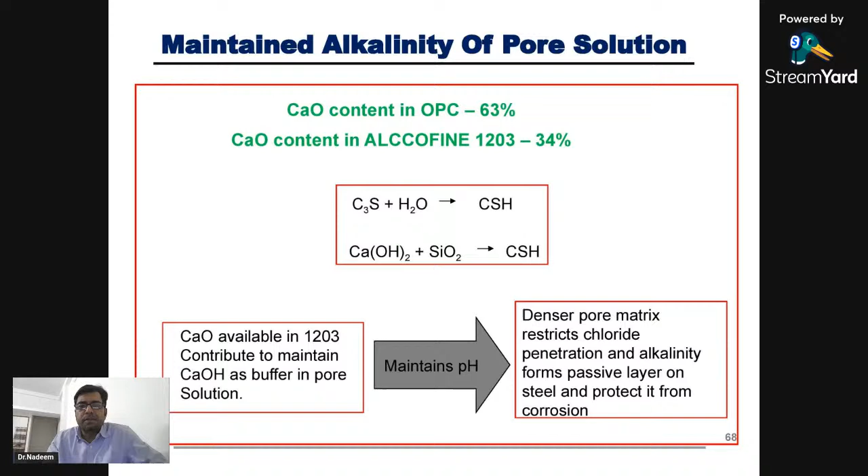So both ways it reacts with calcium hydroxide and gives a denser pore matrix. It restricts the chloride penetration and alkalinity of the structures, and these provide protection from corrosion of reinforcing steel.

Particle packing, we already understood earlier. Because of this microfine material, it actually reduces the capillary pores, meaning the connectivity of the pores is reduced. On one side, if you have this picture, all the pores are interconnected. Once you add a microfine material, it blocks those pores, and you have pores maybe in a minimal percentage, but those pores are not interconnected. Once it is not interconnected, this will not allow passage of other ingredients, either in the form of chloride, sulfates, water, or carbon dioxide. So it's always useful to use microfine material, which reduces the pores and improves the permeability, lowering it, and it's always better for the structure.

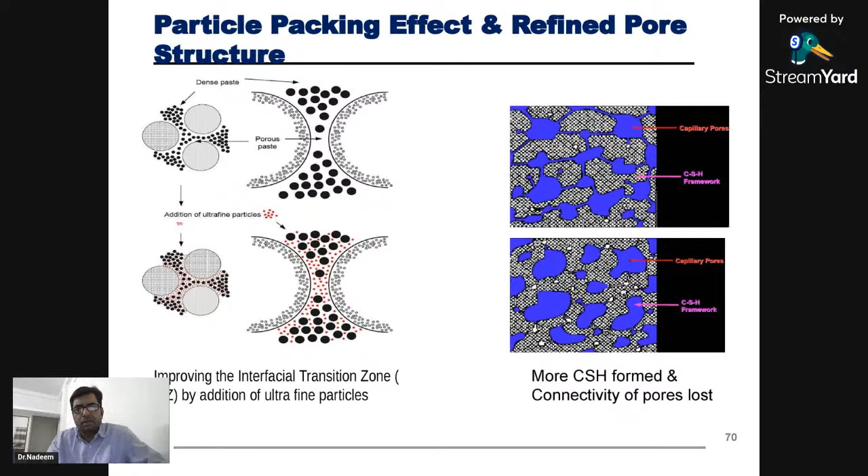So what are the durability improvements due to microfine additives? There are a lot of advantages by using microfine material in a cementitious material. In a fresh state, it improves the workability, improves the rheology of the mix, and reduces segregation of the mix. It also reduces the heat of hydration, because OPC gives a lot of heat, which gets reduced by addition of microfine supplementary cementitious material.

At a hardened stage, we just saw a lot of improvement happens with respect to durability. Once you are reducing the pores and reducing the permeability, naturally you have a lot of advantages. It also improves resistance to alkali-silica reaction, improves strength, which we saw, improves resistance to chemical attack and corrosion, and also lowers the permeability.

So I'll just share a few of the case studies where this product is being used.

This is the MTHL, Mumbai Trans Harbour Link project, where a 22-kilometer bridge is being constructed from South Mumbai to New Bombay, connecting them. This is the longest bridge in India, and the project is in a very aggressive environment.

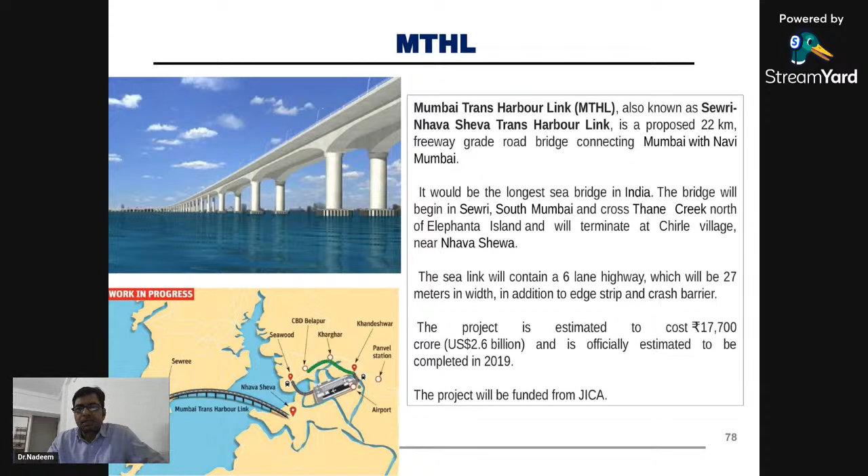They have very stringent durability requirements, with a service life of more than 125 or 150 years. The durability specification used RCMT, because RCPT is not the right test unless there's a direct correlation with a ponding test. RCPT is not actually measuring chloride penetration, but measuring the flowability of charges, which may not necessarily be chloride.

This is why RCMT is now being recommended and used, as it actually measures chloride penetration. An RCMT coefficient of less than 2 into 10 raised to minus 12 is considered very good, 2 to 8 is considered good, 8 to 16 is normal, and above 16 is poor.

For the substructure, the requirement was less than 2 into 10 raised to minus 12 meter square per second. For the superstructure, the specification was 2 to 8, the good range. Water permeability in the specification was less than 10 mm, and ISAT was specified at 0.25 ml per square meter per second. These were the durability specifications for that project, and they are being achieved.

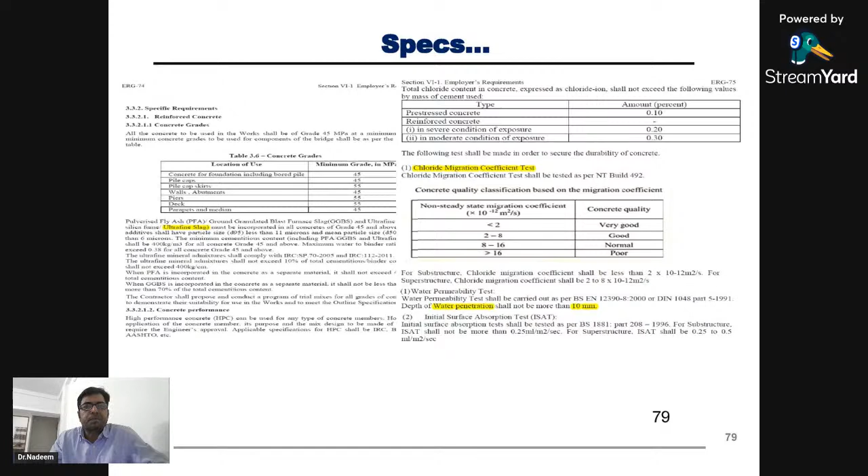This is an underground metro project. Here the requirement was early high strength, because after TBM boring, it needs to be covered with concrete liners. These are precast liners fixed with six pieces making up the complete diameter. This underground metro is also designed for a service life of more than 100 years.

For this liner, they were looking for early high strength, 12 MPa in 12 hours, to reduce the cycle time since it's precast and molds need to be used regularly in a reduced cycle. So the cycle was 12 MPa, 12 hours.

They also had a durability requirement for RCPT of less than 1000 coulombs, and water penetration less than 12 mm. This is how Alccofine is being recommended and used for this project.

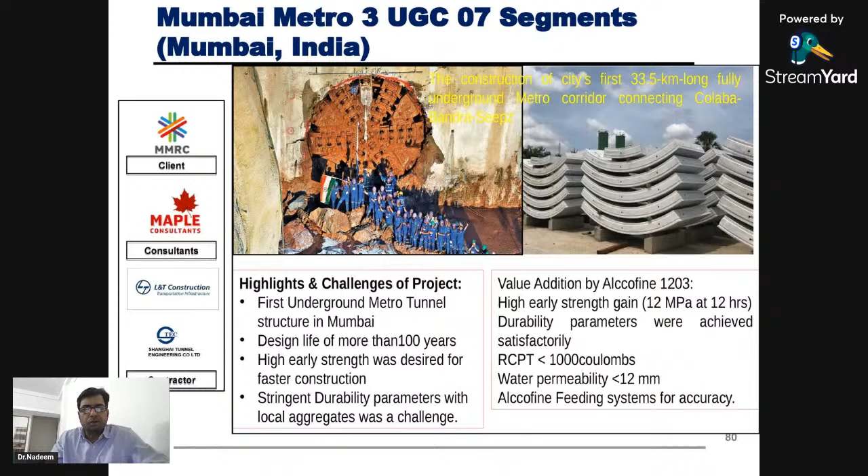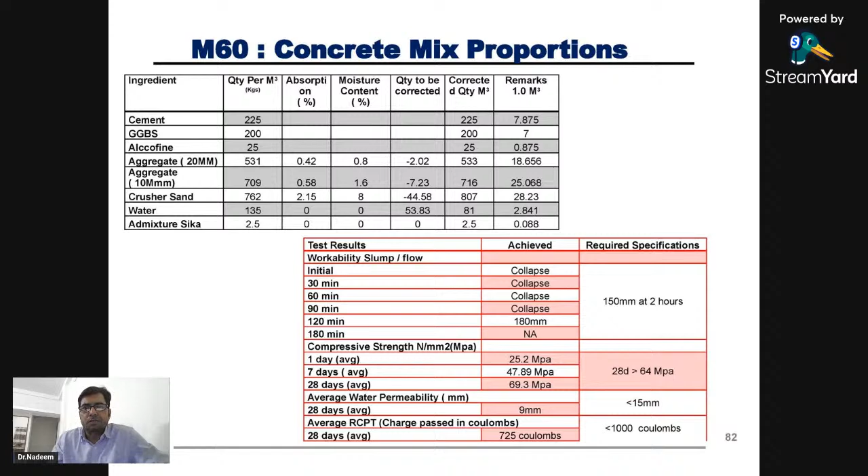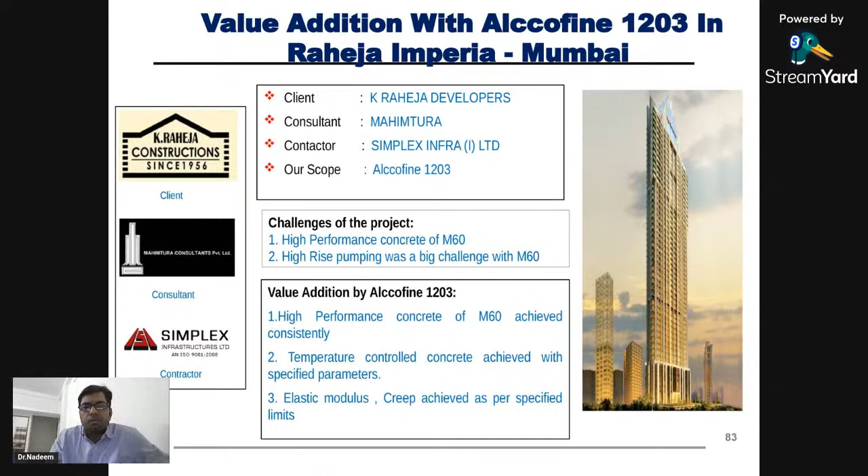This is another project, a tall structure in Mumbai. Again, high performance concrete, M60. Their challenges were mostly for pumping to that height, and of course other requirements of elastic modulus and creep. Naturally, you need to use along with cement all the supplementary cementitious material and microfine material to achieve those specifications.

So now to come to the end of whatever we discussed and saw, which is not possible without utilization of fine and ultra fine material along with concrete chemicals and cement. Otherwise, whatever structure we discussed, and which we saw, and maybe the structures which will come in future, are not possible unless those ultra fine and microfine materials are used, along with water reducing admixtures, as one component to achieve those specifications in concrete.

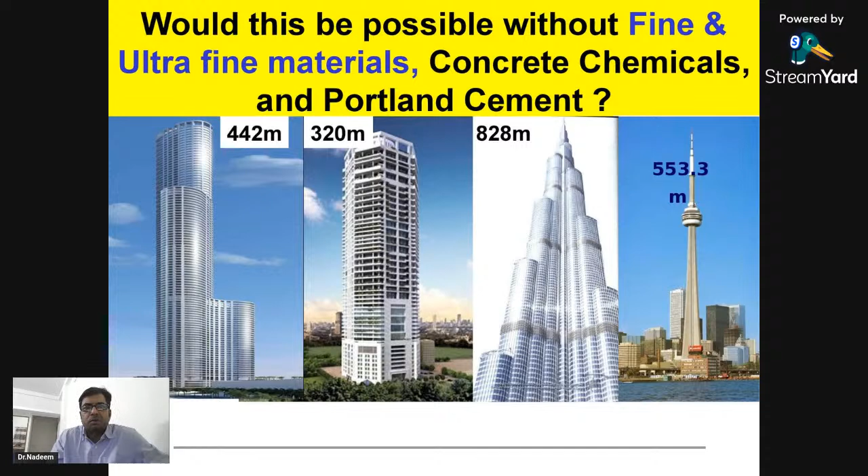So just to conclude, for proper particle packing, microfine or ultrafine material have to be used in conjunction with fine material, which we saw.

If you want to reduce the porosity and permeability, we need to use those microfine materials along with cement and supplementary cementitious material. Shape, size, and particle size distribution of fine and ultrafine material play a very important role in workability, cohesiveness, and pumpability.

In HPC, fine and ultrafine material play a very important role, which we discussed, in strengthening the interface between the binder paste and the aggregate, which is very important in high grade or high strength concrete's interfacial transition zone.

Free water and entrapped air get reduced in binder paste when fine and ultra fine material are used, and this also reduces shrinkage, because in higher strength or high grade concrete our cementitious content is on the higher side. So another issue comes in the form of shrinkage, but once you have microfine material in that, shrinkage also gets reduced. This is another advantage.

Of course, mixing has to be done properly because it's a very fine material which is in colloidal form, so proper mixing is required. And if you are using silica fume, which is in condensed form, various studies say a normal mixer is not able to mix this condensed silica fume properly, because once it comes to its original submicron sizes, it's very difficult with a normal mixer. That also we need to keep in mind.

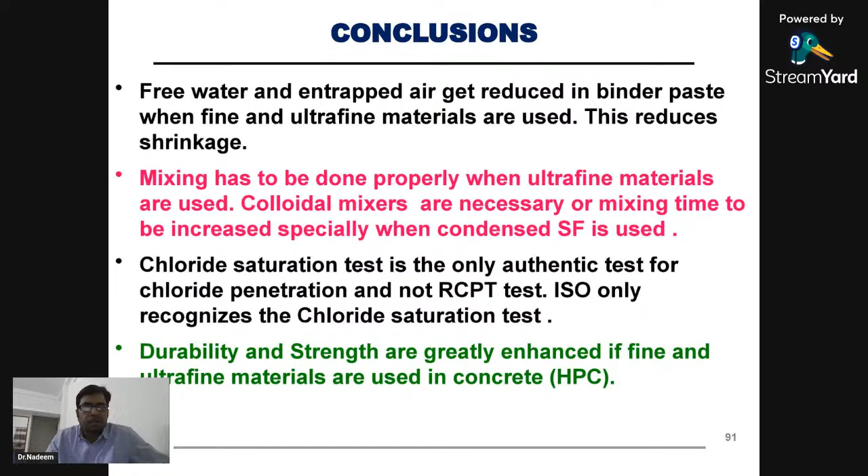This is how we concluded, and I think we understood this from the earlier slides and presentations. With this, I'm concluding the presentation. Thank you all. If you have any queries, let's see if we can check the chat box.